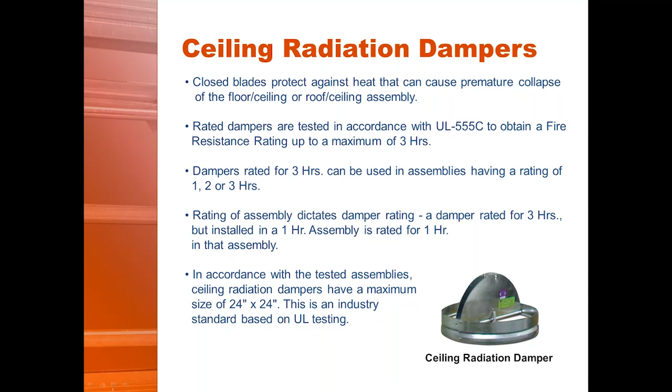With the ceiling dampers, however, as Daniel just said, regardless of the rating of the individual damper, it takes on the rating of the assembly that it's installed in.

Correct. As far as fire closure devices, like I said a second ago, here's kind of a sketch of a standard everyday round run-of-the-mill radiation damper. It's butterfly blades with a spring there that would spring the dampers closed, and it's held together here by this fusible link. What you see here is called an LCB type link; that's the manufacturer link.

Different manufacturers may use different links. We certainly use different links for different products, but for all of our radiation dampers, we'll always use an LCB type link, and it looks just like what you have up here. It's basically two pieces of metal that are soldered together, and you can kind of see the break there of the two pieces of metal, and they're just soldered together.

And the way they work is that solder is designed to start to get a little supple at a certain temperature. And once you hit that breakover temperature, that solder does get supple, and the link will separate under load. And when that link separates, the damper itself will close, and that's where you create your fire barrier.

One thing, just something on the fusible links. We showed on a previous slide that, at 165, the link would trip and close the damper. A couple of things about that: one, links don't sit there and do nothing until they get to 165 and then trip.

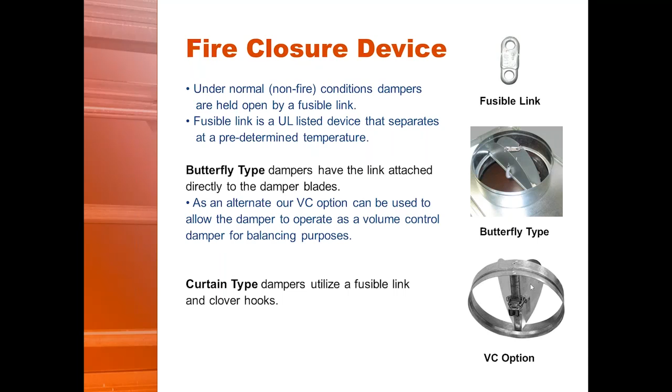So there's 4 major tests. Of those 4, there's one that's really major and more difficult to pass, and it's the fire endurance test. Basically, in that fire endurance test, we're installing a damper in a full truss assembly, and then we're putting that truss assembly under fire load or some kind of prescribed fire situation, and we want to see how that damper is going to react.

And ultimately, what we're looking for is those blades to close, and then we're looking for, over the course of an hour or whatever the predetermined time is, to make sure that there's not too much heat transfer from below to get up above the damper into the truss space. So that's the most difficult test for us to pass. But we also have these other ones we have to pass also.

Salt spray test. What we're trying to do there, or what UL's trying to do, is mimic what these dampers are going to see over the course of their lifetime. So we have a salt spray test to simulate that dust, and then the damper's got to operate after it undergoes that spray test for 5 days.

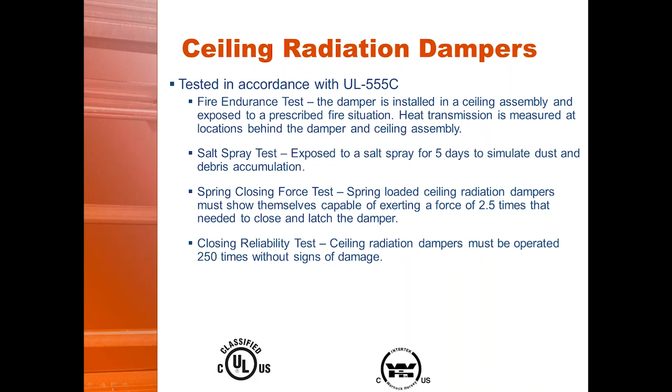Blades are held open, let go against the spring. And the idea here is to test the construction of the damper to ensure that repeatability and that it is going to close and function as designed. So, it's only designed really in a heat situation to close once. So UL does a 250 cycle test to make sure that rivets, pins, anything, toggle locks stay intact.

Okay, so now getting into 2 different types of ceiling types that we're going to talk about. One is called suspended grid or non-combustible, kind of used either way. And that's just a ceiling membrane that's held in place generally by a wire-supported metal grid. So typically when you see a lay-in ceiling, those typically are not rated any longer, but in some cases they would be, and that's where you would have that.

So you would have a 2x2 lay-in ceiling. You'd have a 2x2 step-down grill probably. And on the back side of that grill, the neck of that grill, that's where you'd put this radiation damper in that kind of application.

Yeah, and the test requirements you saw on the previous slide, when you test to those parameters, and if you're successful, what you get actually is a rating on your damper that is only for these non-combustible ceilings. Okay, lay-in ceilings, they used to be popular at one time. You had a lay-in diffuser with a blanket on the back and a damper on the neck. That is the approval that you got.

When you get into the combustible assemblies, and we'll talk about this in a second here, you have to test individually into every one of those assemblies to get approval for them. So it's kind of two different ratings, but the basic UL test just gives you the non-combustible rating. Yeah, and on the combustible side, there's 3 separate types that UL kind of breaks it down into. We're going to talk in detail about a couple of these.

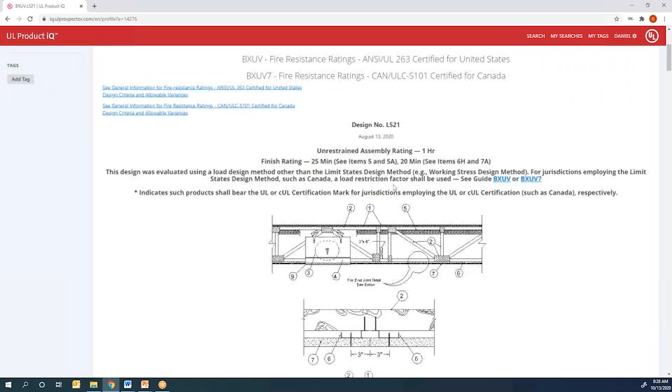You might have to create an account with UL. I certainly have one, but it's free and it's quick and easy, so don't worry about having to pay for it. And so what you have here is this assembly that basically tells you exactly how to build this entire assembly. It tells you the truss spaces or the truss distances, the heights, the type of wood, type of chipboard, everything you would need to build this assembly you have right here.

You can kind of see a drawing of it here, and then you go on the details and you'll see what kind of subfloor, what kind of vapor barrier. So it tells the contractor exactly how to build and what materials to use. Now, in terms of damper, you can go through here and read all of it. The easiest thing to do, because there's a lot of information here, is just to do a control find up at the top. It'll open up and just type in damper.

And then it's going to bring you down here to show you which dampers are allowed. You see ceiling radiation damper, and then it talks about the maximum requirements, so what the depth is, how large it can be, and all that fun stuff. But more importantly, it tells you the model damper that is allowed, and then the alternate if there's an alternate allowed. So you'll see Pottorff, we actually own this listing.

So all Pottorff companies, CNS, that's one of our sister companies, Pottorff CFD 521, Pottorff CFD 521 BT, and so on and so forth. You'll see all the Pottorff models, but you won't see any of our competitors. And then you'll see Delta. Like Tom said a second ago, we OEM for the top three, Delta, Broan, and Panasonic. So you'll see Delta models, Panasonic models, and Broan, but you won't see any of the competitors.

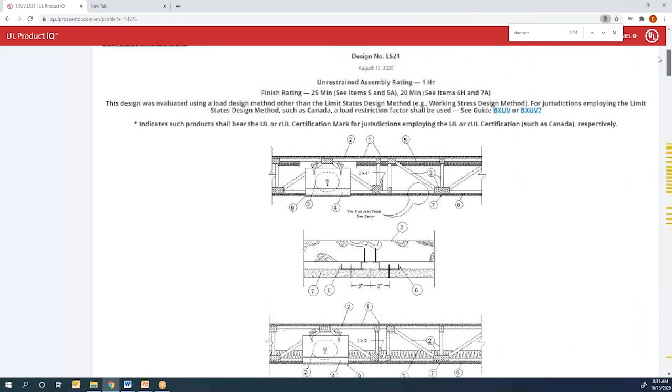Now, there are some that are generic, as Daniel said, where UL will allow multiple manufacturers in there. And there are some that are proprietary, like, for example, 521 here. There also actually are some proprietary to other manufacturers. So you do need to take a look at that design or know what that design is when you're quoting a product to make sure that you're okay.

Yep, and so I'm going to quickly Google another one. UL L003, one I found before we came on here. And again, the first UL option. Then you click on it and you see the picture. First of all, there is no damper. That's not always a telltale sign, but it's pretty close. The telltale sign is if you do a control find and you don't find the word damper in there, that means this assembly does not allow for any duct penetrations with dampers behind it.

So in this case, if you were to come across this, you need to reach out to the inspector, the engineer, whoever it may be, and figure out an alternative course of action, because they either need to change assemblies, which would be kind of hard in the middle of a project, or more likely they would just allow some kind of deviation and allow you to use a rated radiation damper. So certainly bring it to their attention, because if not, you may get caught by the inspector and then it may be too late.

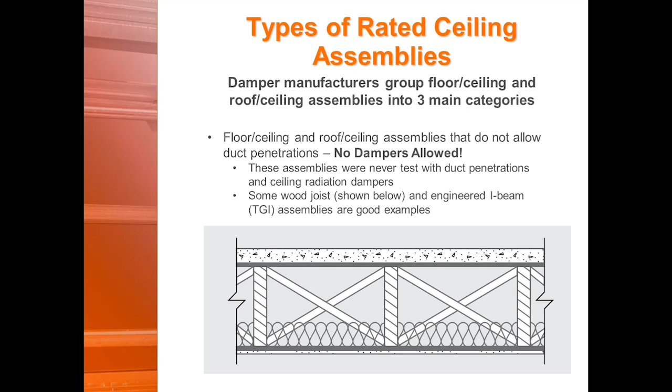So this just kind of reiterates, if we send this out for the folks that didn't see the UL website, this just kind of talks through those three main categories one more time. So again, if there are no dampers allowed, you can see this is just a truss base here, and there's no penetration whatsoever. The next one's going to be if you had just a generic radiation damper or even just like a hinge style door that's actually fabbed in the field. Very, very uncommon, but UL certainly allows for it in very few applications.

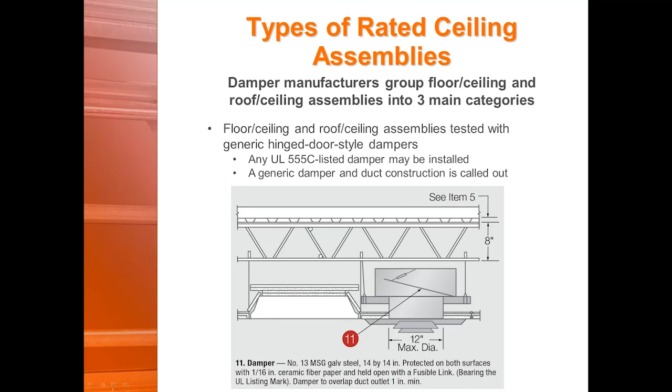So what you see here are some of the transitions. 9 times out of 10, what you're going to have is just a round transition on one side or multiple sides. But you can also have the oval. If you're going to go with the oval, we just need to know the width and the height, and we can certainly fab the oval.

Same thing with the rectangular. Give us the dimensions, and we can put that transition in pretty much any side of the damper as long as the size permits. Our standard size for the collar is 2 inches deep, but we can go beyond that to a 3 inch deep collar if you really needed it, but 2 inches is pretty straightforward.

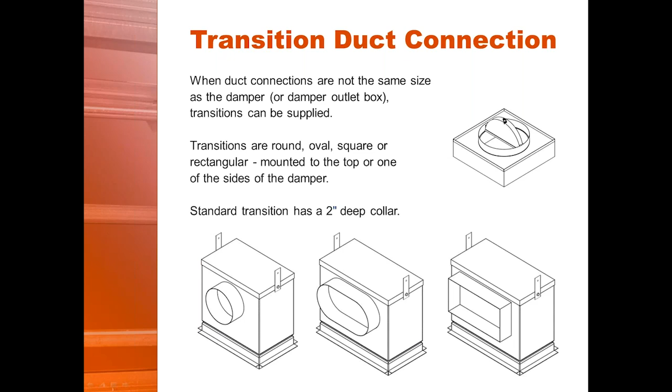So now getting into some of the Pottorff specific dampers and kind of the pros and cons of each and when and where not to use them. So just a baseline CFD 15, this is what you would see a lot of times in the non-combustible type of ceiling. So in like a 2x2 lay-in that we talked about, where you go in the back of a grill, this is where you would see that many, many times.

You also see, if you look close, there's some blade insulation on the back side of those blades. What that does for us when those blades close, it just gives us a little bit more insulation to create that thermal barrier to pass that fire test. So you won't see this on all of them. Some of the dampers, I forget the cutoff exactly, maybe you know, but with the damper small enough, we don't need the extra insulation. But when you get into some of the larger sizes, we need that extra protection. So we'll put that blanket on the back there.

Yeah, every manufacturer does it differently on these. Again, the insulation on the blades is to stop the heat from radiating through up to the members above. So it really just depends on how you can pass the test. Some manufacturers put insulation on all sizes. We put it on 12 by 12 and over. Anything under 12 by 12 would just be the bare blades, just the metal, because we've proven that just the blades in those small sizes can still prevent the minimum amount of heat from going through. It does just depend on manufacturers.

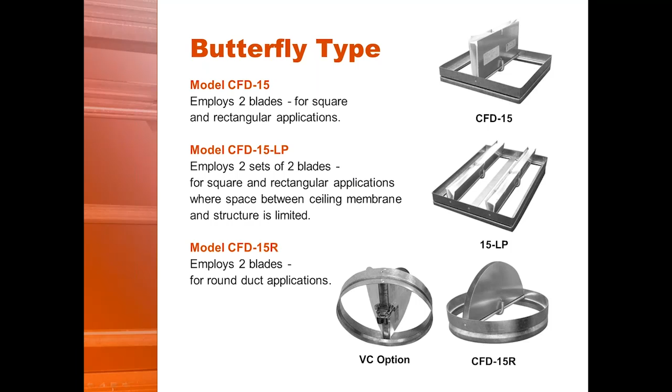You don't order it. You don't have to pick it. It's size dependent, so it's automatically manufactured that way depending on what size you order. Yep, and then we have CFD 15R. That's just a run-of-the-mill round radiation damper. It's a round version of the CFD 15. We typically see a lot of these in fresh air intake coming into maybe an equipment room or an air handling room or something like that. That's where we'd see a lot of these.

CFD 15SB, that's just another type of CFD 15. Instead of using a butterfly blade, we use a single blade. So what it allows you to do is cut down the pressure drop. It's relatively uncommon to see these because butterfly blades don't have much pressure drop anyway, as long as it's set in right. But the idea behind this is you have one single blade rather than the butterfly blade, and it does reduce a little bit of the pressure drop.

And then the CFD 521, so this is probably the first wood truss radiation damper that we came out with. And what it is, it's a sheet metal box over a CFD 15, simply put. It's tested a little differently, but ultimately that's basically what the damper is. We don't see this used very often. I would actually caution you guys from using this one unless you absolutely need it. If you're able to use the CFD 521 IP, the IP is a lot more cost competitive.

But the CFD 521 is great specifically for nursing homes where code's not going to allow you to have any kind of fibers in the airstream like a fiberglass. That's where you would use this. It's just a sheet metal box, and then they would come in after the fact and insulate the exterior of the box. So for nursing homes, it's certainly great to keep those fibers out of the airstream while getting the same fire protections you would get from any other radiation damper.

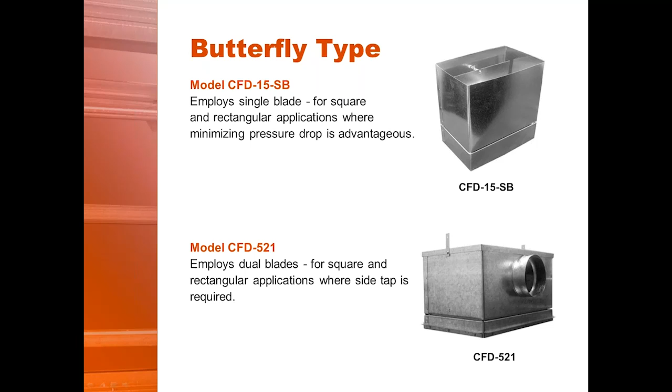The CFD 521BT, that's the boot. This is a plug and play. Basically, any residential boot that you would see, that's exactly what this is. The inside of it is insulated, so you do get that R rating, but you do get those fibers in the airstream. So typically, you would snap boot rails on either side, put this thing up into the truss space, and basically walk away. It's that easy to install these little BTs.

And then the CFD 521 IPs and CFD 521 STs, these are the same thing, just installed a little bit differently. But essentially what they are is a CFD 521 with an insulated plenum instead of a sheet metal box. So these are much more cost efficient, much easier to install, and much easier to cut the taps in the field. So for those reasons, we see these much more often than the CFD 521s. This would probably be what you'd want to use, I would say.

Yeah, just a couple points of differentiation on the standard CFD 521, the metal box. You're always going to order that with whatever tap you need. It would be kind of difficult cutting taps in the field on those. The downside to that is that you put the tap on a particular side, they get it in the field, the way the truss runs is opposite, so now it's interfering and you have the tap on the wrong side.

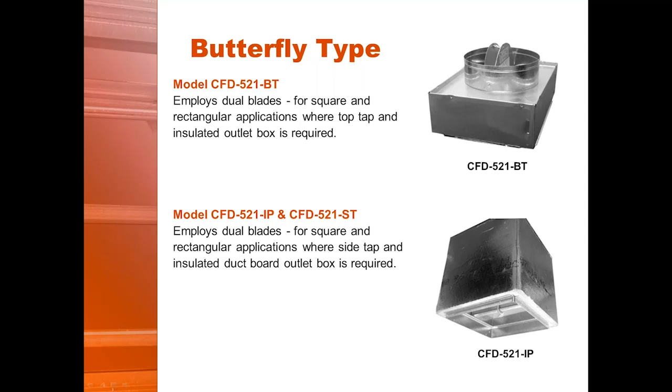And then you get the CFD 521 NP, and this NP just stands for no plenum, but it's exactly the same thing as the IP. The only difference is the guys are going to build the plenums in the field. That's just a preference thing. Some guys want to order the assembly 100% from the factory. Some guys want to order just a damper and build their own box. And of course, we do have installation instructions showing exactly how to build that insulated plenum on top of that box and install it. So that's just a preference to the contractor.

Yeah, just a side note on that. That says field mounted insulated ductboard box. We actually also now have approval for a steel box. I don't know why anyone would want to do that, but you can buy the damper and put your own steel box on it also.

And then the last one, and one of the most recent additions to the CFD 521 family, is the CFD 521-90. So this is the exact same thing as the CFD 521 BT. The two major differences are, one, obviously, the tap comes out the side. So a lot of times, depending on the size of your damper, duct and truss space, you may not have room to get your duct to go all the way around to the top of that damper. In this case, you actually penetrate the side.

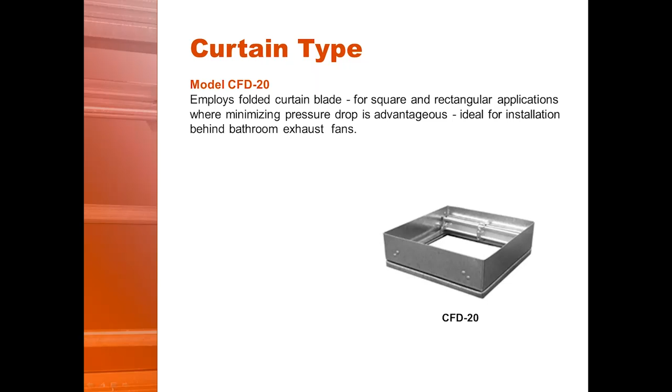So you could not, as I said previously, just buy this damper and marry it with a fan. You would have to get the damper from the OEM or the fan manufacturer along with the fan for it to maintain its UL rating assembly.

So the last radiation damper slide we've got is dynamic closure requirements, and this is very important because it's relatively new. I think it was 2015 of the International Building Code that it was actually adopted into the code. And it wasn't until maybe a year and a half, 2 years ago, we actually started to get questions about it. But you'll see this on the right-hand side here.

This is actually a cut and paste from the code, and it says only fire dampers and ceiling radiation dampers labeled for use in dynamic systems shall be installed in heating, ventilation, and air conditioning systems designed to operate when the fans are on. So 9 times out of 10, in these specific assemblies, especially the UL assemblies, the fans are not designed to operate in the fire.

So they're going to be tied to maybe a smoke detection system or whatever it is, so that in the course of a life safety event, these fans do shut down. But in some cases, you will have what code is calling dynamic closure for a radiation damper. Yeah, let me back up a bit and give you some of the history behind this.

Just like 20 years ago when fire dampers were static only, and then they came out with a dynamic test standard, the same thing has happened with radiation dampers. Now, the advent of this was from the fact that you have your unit in the closet and you're going to be blowing air up into the space and to the outlets. Previously there was nothing that would guarantee that those dampers would close if the air handler stayed on in an incident. And there was no such thing as a dynamic damper or test point in the UL standard.

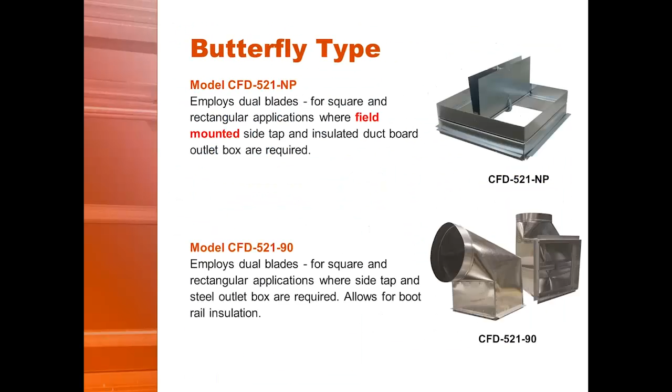And I had one more question, and it has to do with a drawing that we showed early on asking about the rated assembly versus a fire damper installation. So I'm going to go back there and try to find that. While I'm doing that, if anybody else has any other questions, feel free to type into the chat box or take yourself off mute and ask questions. We can certainly go through those, but I'm going to run back here and try to find this slide that John was referencing. It's the one that says rated assembly versus fire damper. See if I can't find the rated assembly drawing.

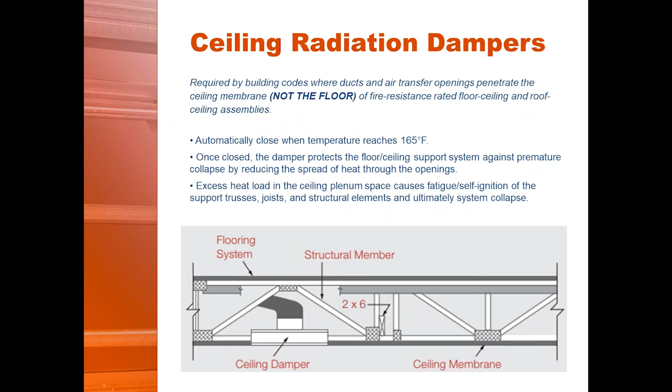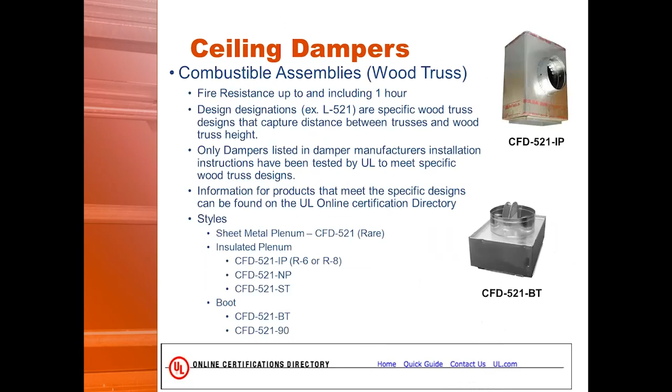I'm sorry, Daniel, I didn't hear the question. The question was, can you go back and explain the drawing on the right, rated assembly versus fire damper installation? So I'm not seeing the drawing, but what I'll say is, if you're comparing a fire damper installation to any of these rated assemblies that we went through, they're 2 completely different beasts. So fire dampers are not allowed to be installed in any of the assemblies that we've talked about today. Fire dampers cannot be installed in anything except for a concrete or masonry partition when installed in the horizontal position, except for very, very few limited cases.

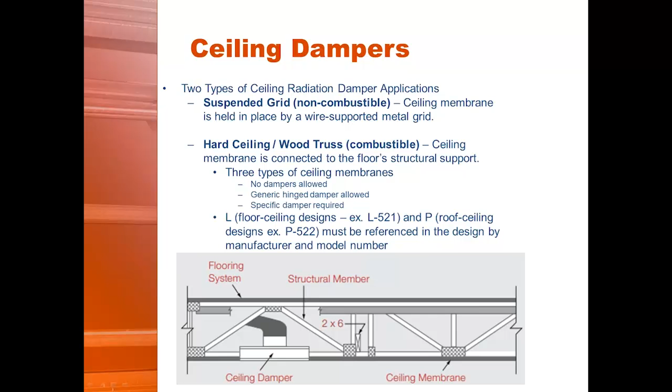Yeah, where you're putting these dampers in horizontally, there are no fire dampers approved for combustible assemblies. There is one particular one that's for top of a shaft or bottom of a shaft, but in general, in any of these floor penetrations or ceiling penetrations, you would not put a fire damper. They're not approved for it.